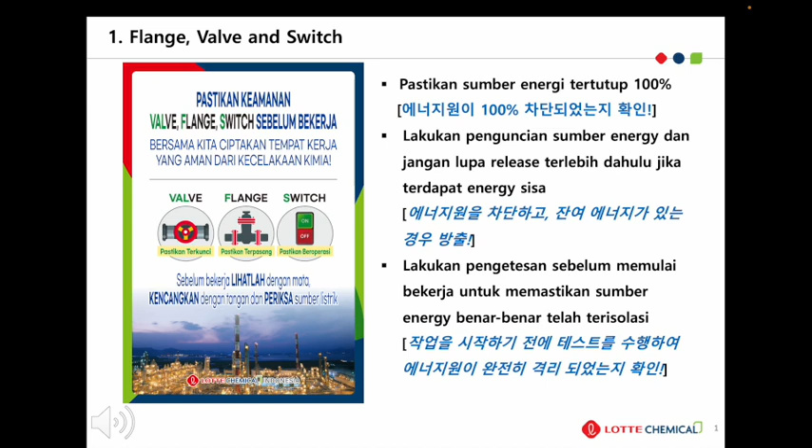Pertama, pada tanggal 22 November 2016 terjadi kebakaran di ExxonMobil di daerah Louisiana, Amerika Serikat. Kebakaran terjadi dikarenakan isobutan rilis dari sela flange. Isobutan membentuk awan yang mudah terbakar dan meledak 30 detik setelah rilis. Kejadian ini menyebabkan 4 pekerja terluka.

Penyebab dari kejadian ini adalah pekerja kurang terlatih dalam melakukan pekerjaan sehingga ia membuka valve yang seharusnya menjadi penahan rilisnya bahan kimia dari dalam pipa.

Kedua, pada tanggal 13 September 2010 telah terjadi kebakaran di salah satu pabrik petrokemikal di dunia. Kejadian ini disebabkan oleh kebocoran heksan dari salah satu valve reaktor. Kebocoran tersebut menyebabkan level fluida dan tekanan drop yang selanjutnya diikuti ledakan besar. Kejadian ini menyebabkan 1 pekerja meninggal dunia dan 4 orang pekerja terluka.

Penyebab dari kejadian ini adalah salahnya pemasangan blind screen yang mana seharusnya dipasang 2 namun pekerja hanya memasang 1 saja. Selain itu penyebab kedua adalah kurangnya monitoring proses yang menyebabkan tekanan tinggi di dalam reaktor menyebabkan aliran heksan menuju pipa yang salah. Sehingga menyebabkan kebocoran heksan dan membentuk awan yang mudah terbakar.

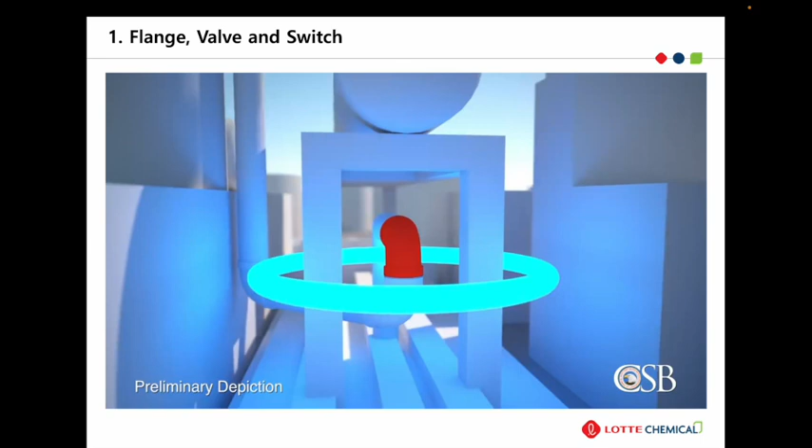The alkylation unit produced components of high-octane gasoline. The leaking process fluid formed a large ground-hugging vapor cloud that surrounded some sections of the unit. 2 minutes later, the cloud ignited, causing a massive fire.

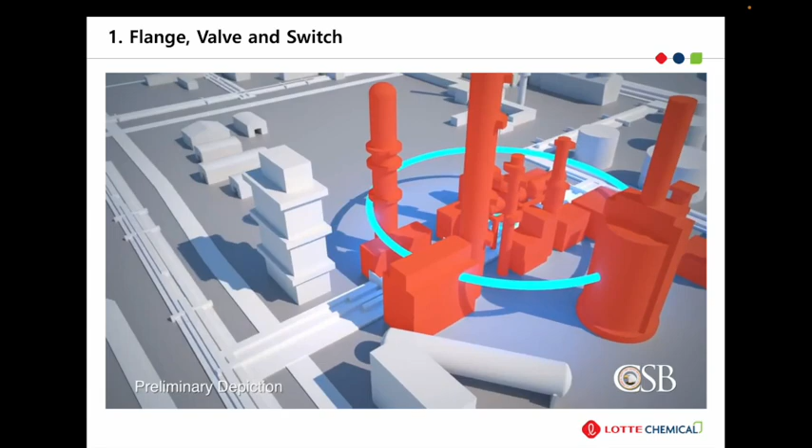A control room operator quickly took steps to prevent the release of additional HF by rapidly draining the unit's hydrofluoric acid to a special vessel designed to hold the acid in the event of an incident.

At 4:15, during the ongoing fire, an explosion erupted in the alkylation unit. 4 minutes later, a second explosion occurred. At 4:22, a process vessel in the unit containing flammable hydrocarbons violently ruptured, causing the largest explosion.

A large 38,000-pound fragment of the vessel flew across the Schuylkill River and landed on the river's opposite bank. 2 other fragments, one weighing about 23,000 pounds and the other about 15,500 pounds, landed inside the refinery.

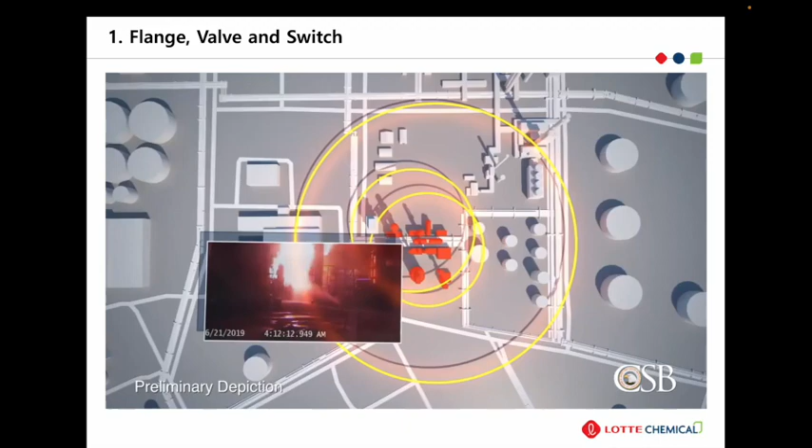The fire burned for over 24 hours until it was finally extinguished the following day at about 8:30 a.m. 5 workers sustained minor injuries during the incident and response. The CSB is unaware of anyone experiencing health impacts from the hydrofluoric acid release.

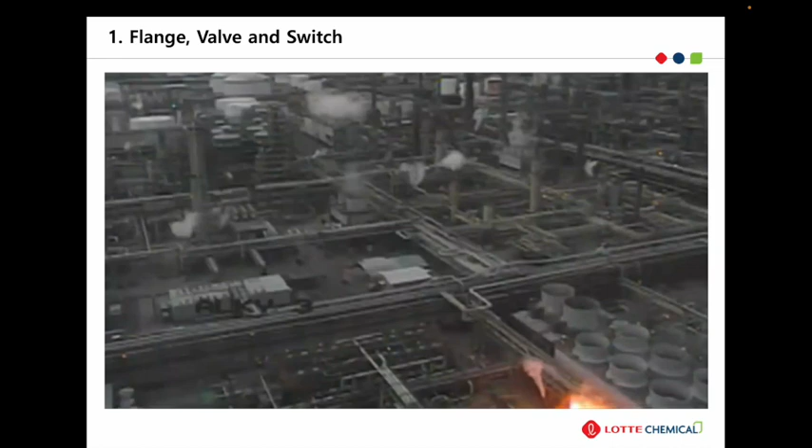November 22nd, 2016, the ExxonMobil refinery in Baton Rouge, Louisiana. A fire erupted during maintenance activities, severely burning 4 workers.

The fire occurred when operators inadvertently removed bolts that secured a piece of pressure-containing equipment to a type of valve known as a plug valve. When the operators then attempted to open the valve, it came apart and released flammable isobutane, which formed a vapor cloud that quickly ignited.

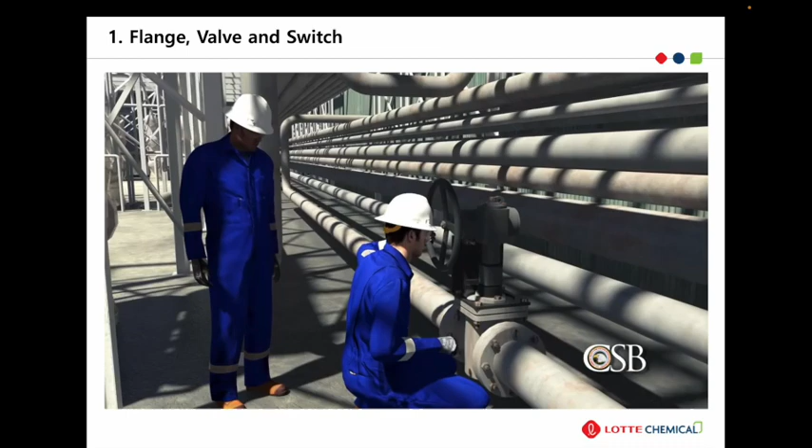During our investigation, the CSB learned that the operators attempting to open the plug valve were following accepted practices within the refinery. Unfortunately, those practices lacked a safety hazard analysis, which needlessly put the workers at greater risk. The management of safety is critical to the protection of workers and the integrity of facility operations.

The fire at ExxonMobil's Baton Rouge refinery occurred in the sulfuric acid alkylation unit. There, isobutane and olefins are converted into a major component of gasoline through a reaction involving sulfuric acid.

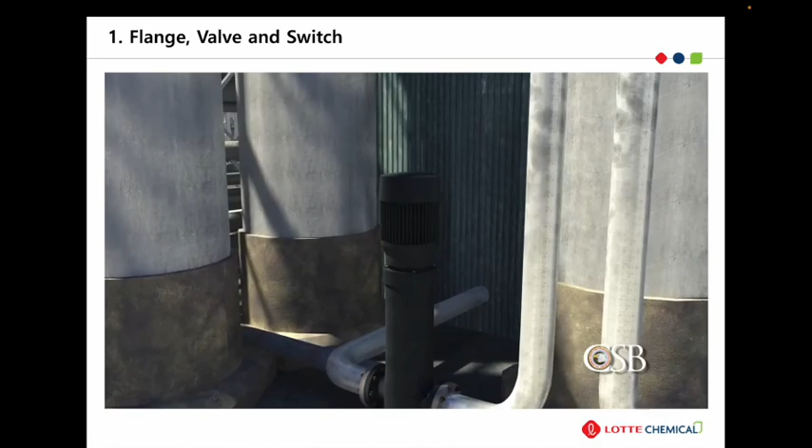On the day of the incident, 2 operators were preparing to put a spare isobutane pump into service. To do so, the operators needed to open the pump's inlet plug valve. That plug valve was operated manually. A hand wheel and a piece of equipment called a gearbox were connected to the valve by a support bracket. The gearbox uses gears to make it easier to turn the valve stem into the open or closed position.

The operators turned the hand wheel on the spare pump's inlet plug valve, but the gearbox was not working properly, and the valve would not open.

When the gearbox was malfunctioning, it was an accepted practice in the alkylation unit for operators to remove the gearbox so that a pipe wrench could be used to turn the valve stem and open the valve. The gearbox was connected to the valve body by the support bracket using bolts.

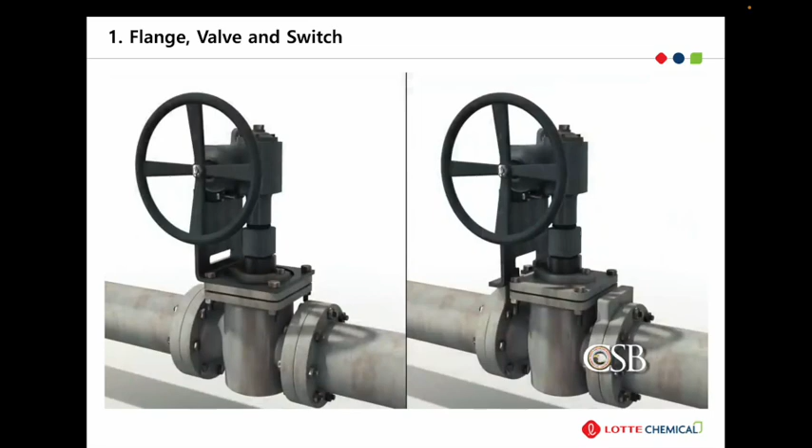The operators removed 4 vertical bolts from the valve. But unknown to the operators, these bolts also secured a critical pressure-containing component of the valve known as the top cap. Approximately 3% of the numerous plug valves in the refinery's alkylation unit were designed so that the gearbox support bracket attached to the top cap.

With this 30-plus-year-old design, removal of the gearbox support bracket can have catastrophic consequences. Approximately 97% of the valves were newer models with updated design that did not connect the gearbox support bracket to pressure-containing equipment, making it less likely to remove the incorrect bolts.

With bolts removed from the top cap, one of the operators attempted to open the valve by rotating the valve stem with a pipe wrench, while the second operator stood by and observed. The valve immediately failed and came apart. Pressurized isobutane escaped from the valve, forming a flammable white vapor cloud.

The 2 operators warned others in the area and directed them to evacuate. Approximately 2,000 pounds of isobutane released to the atmosphere. The vapor cloud likely found an energized welding machine roughly 70 feet away from the initial release and ignited. The resulting fire seriously injured 1 ExxonMobil employee and 3 contractors working in the area.

Our investigation into the incident revealed that management at the ExxonMobil Baton Rouge refinery were accepting of operators in the alkylation unit removing malfunctioning plug valve gearboxes without adequate written procedures or training. The CSB also found that although refinery operators did receive training on hard-to-operate valves, the training did not specifically address how to remove an inoperable gearbox from the older plug valve model.

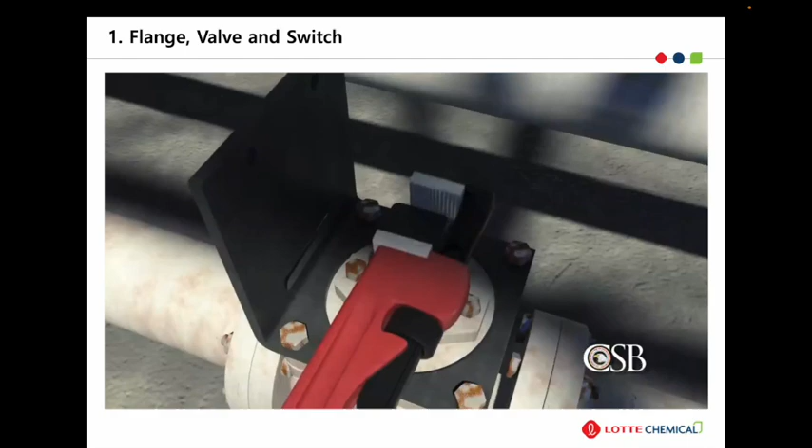In our safety bulletin, we outlined 3 key lessons learned from this incident. The first key lesson is to establish detailed and accurate written procedures for workers performing potentially hazardous work. This is especially important when different types of equipment or configurations exist that could cause confusion.

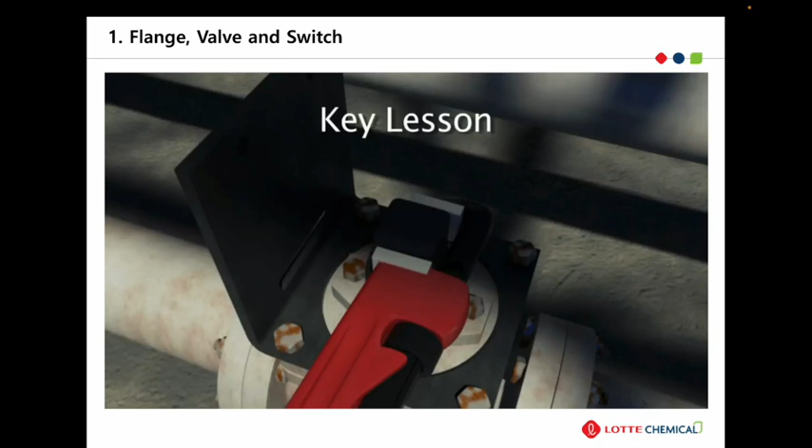A second key lesson is to provide training to ensure that workers can perform all anticipated job tasks. Training should include a focus on processes and equipment to improve hazard awareness and help prevent chemical incidents.

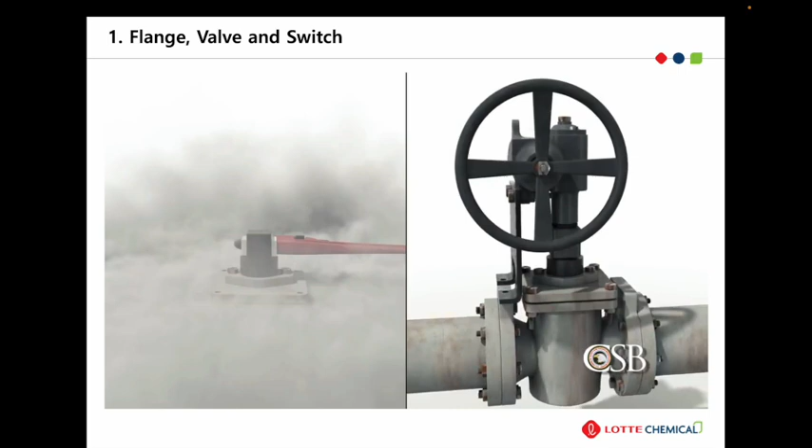In our safety bulletin, we emphasize the hierarchy of controls. This is a method of evaluating safeguards to provide effective risk reduction. Within the hierarchy of controls, an engineering control, such as improved valve design, is more effective than a lower-level administrative control, such as a sign warning workers that the gearbox support bracket connects to pressure-containing components.

The CSB found that the 30-plus-year-old valves left in the refinery were not explicitly required to be updated to the safer design. That is because the older design did technically adhere to current industry standards, which call for items like gearboxes to be capable of removal without affecting pressure-containing parts.

That could be accomplished by removing 2 horizontal bolts that connect the support bracket directly to the gearbox, rather than the 4 vertical bolts that secure the support bracket to the top cap. But on the day of the incident, the operator did not remove the 2 horizontal bolts.

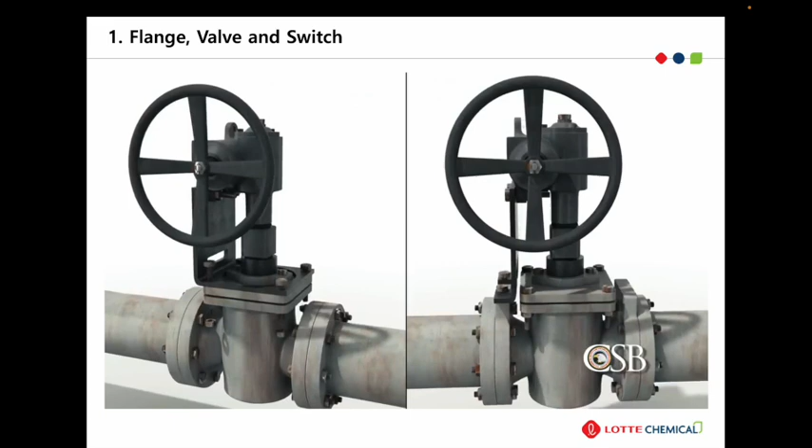The American Petroleum Institute, an industry trade association, says in its safety guidance for improving human performance to make it easy for people to do things right and hard for them to do things wrong. Updating all of the older valves to the safer valve design, as was done to approximately 97% of the valves in the alkylation unit, could have ultimately prevented this incident.

A third key lesson from the CSB's safety bulletin is to apply the hierarchy of controls to mitigate identified hazards. The CSB also found that in its most recent alkylation unit process hazard analysis, the refinery did not evaluate the human factors associated with valve operation and maintenance.

Had the refinery adequately addressed human factors in its most recent process hazard analysis, workers could have discussed difficulties with the removal of the plug valve gearboxes, prompting the company to identify potential hazards. As a result, the older valves could have been recommended for replacement, and the incident would have been avoided.

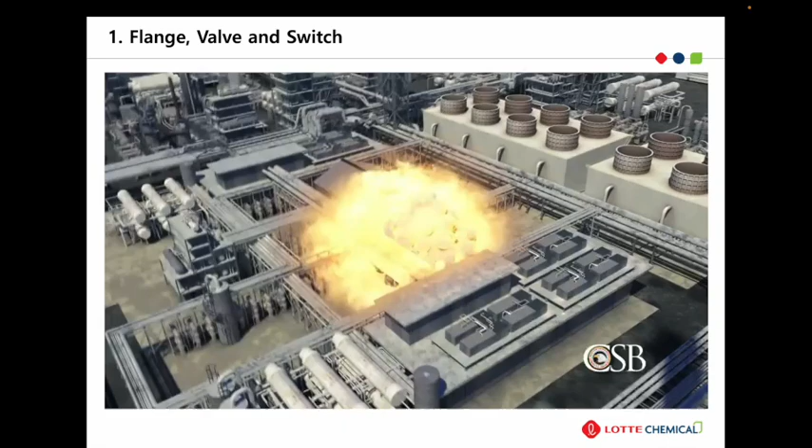The safety management practices outlined in our bulletin could have prevented the fire in Baton Rouge. We urge companies to share and implement our key safety lessons at their facilities in order to prevent future injuries and property damage. Thank you for watching this CSB safety video.

The production sequence of a factory involved the operation of 3 reactors, which could work in series or parallel to increase production capacity. However, it was noticed that one of them was producing out of specification. The leadership team then decided to pause the operation of this single reactor to carry out improvement services.

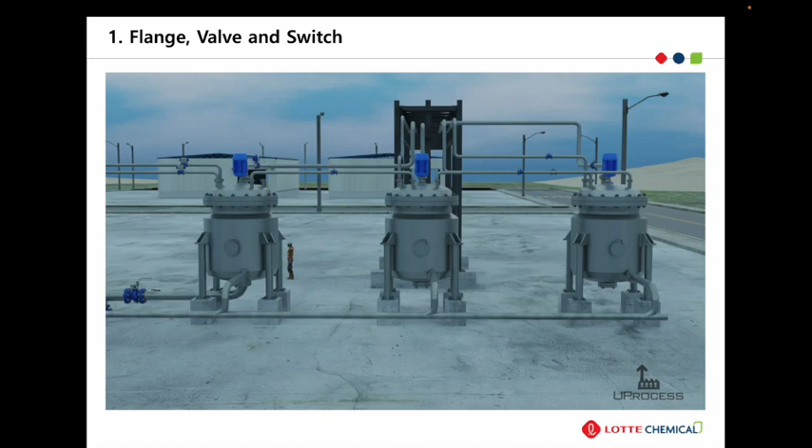A reactor was prepared for maintenance and washed out. The previous solution was drained, and a specific washing was carried out to clean the reactor.

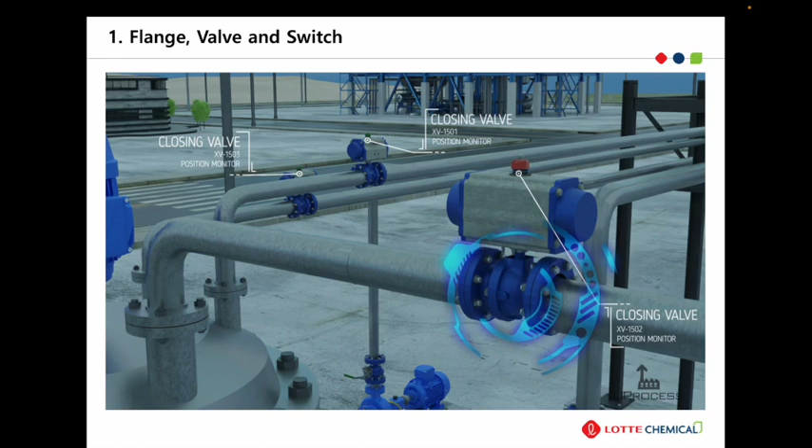The 3 automatic on-off valves supplying the reactor were closed by the panel operator through the control room.

A third-party mechanic was directed to cut the tank drain line to allow for the installation of new equipment. He uses a grinder to carry out the job, supervised by an operator from that area.

However, after a few moments later, they identify a strange noise and started to leave the spot, but they can't escape in time.

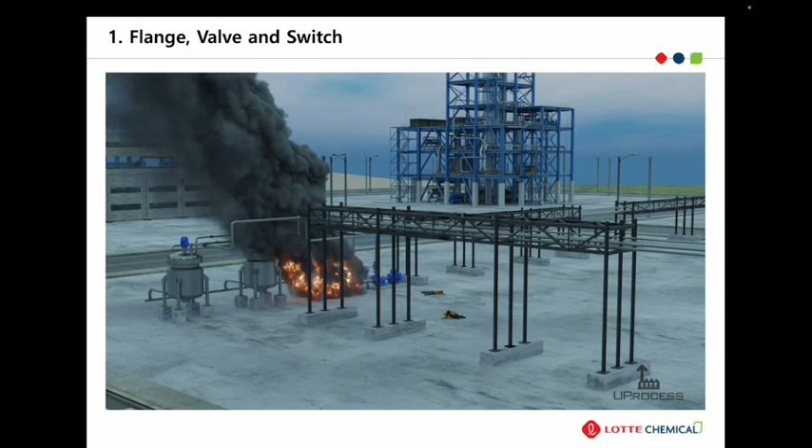Before they managed to leave the place completely, the reactor was blown off and killed the 2 men. A shockwave caused by the explosion knocked the 2 workers to the ground. Unfortunately, they couldn't resist the injuries. Fire and smoke were seen for about 15 minutes until causes were addressed.

So what happened? It was estimated that 7 kilograms of hydrocarbon vapor could have caused the explosion.

Some flammable vapor leaked from the nearby raw material tanks through the closed valves into the reactor and was ignited by a high-speed abrasive wheel, which was being used to cut through one of the pipelines attached to the vessel.

As the valves mistakenly used as blocking were located at a significant height, a local inspection was not carried out to test the effectiveness of the isolation.

After the accident, demonstration cuts were made in the workshop. It was found that as the abrasive wheel broke through the pipe wall, a small flame occurred, and the pipe itself glowed dull red.

The explosion could have been prevented by isolating the reactor by slip plates or physical disconnection. This incident and the others described show that using only valves as LOTO for isolation are not good enough. We must never underestimate checking the effectiveness of the isolation before releasing the permit to work.

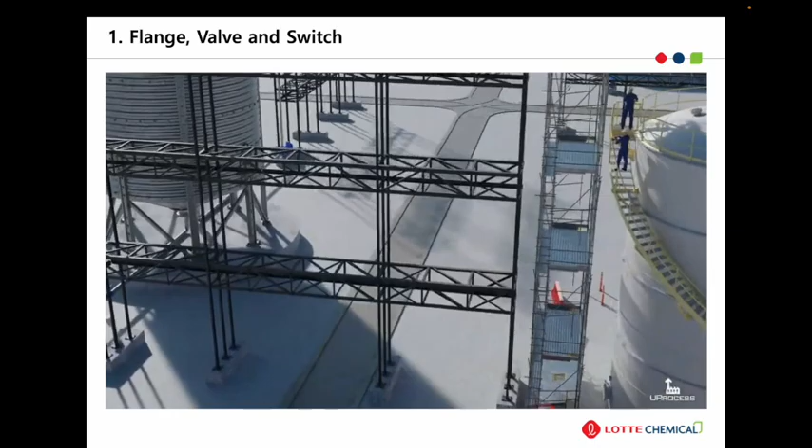A new tank was being filled with water for hydrostatic testing. 2 mechanics were working at the stairs near the roof, finishing the handrails, using angle grinders to polish the structure.

Hydrostatic testing is a process in which components of a system are tested for resistance and leakage by filling equipment with a pressurized liquid. It serves to identify material failures or tank misassembly.

The responsible operator starts the field activities. Firstly, he opens the switch and activates the pump start button. Immediately after he opens the discharge valve, allowing water to enter the tank.

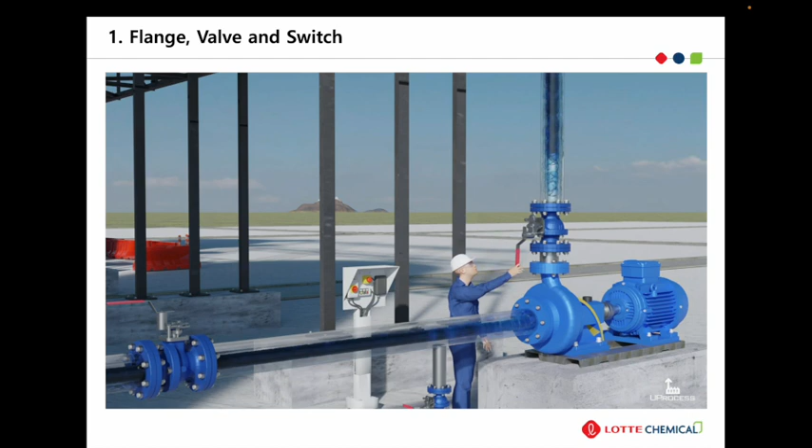But a few hours later, something unexpected happens: an explosion occurs, injuring 2 mechanics working on the tank, throwing them against the handrails.

What happened? The tank had been filled with water through a pipeline, the same pipeline that contained a few liters of gasoline left over from the previous service. So the gasoline was flushed into the tank and floated over the water.

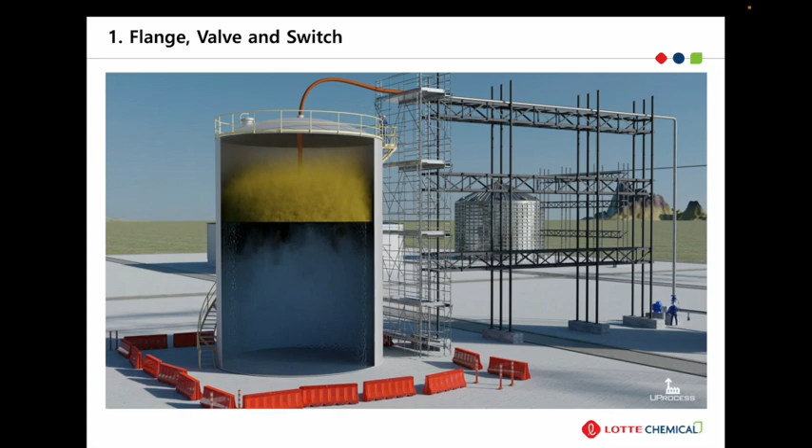And the high ambient temperature caused the gasoline to evaporate. The mechanics performing the hot work eventually ignited the gasoline vapor.

What have we learned? Apart from the fact that the piping has not been purged and mechanically cleaned prior to testing, which already is a serious cause of this event, no one should be allowed to work on the tank during a hydrostatic test.

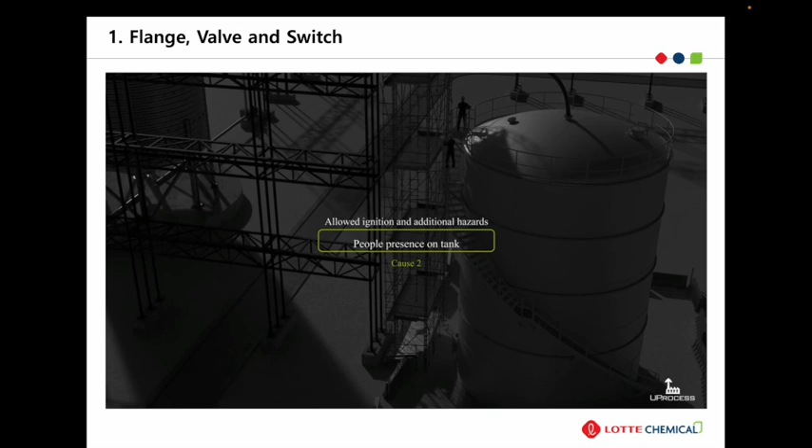One of the reasons for filling the tank with water is to ensure that foundations are strong enough. If you could know that before, there is no need to perform the test. People should be removed from the surroundings and the area should be isolated in case these structures are not strong.

Berikut ini adalah ledakan dan kebakaran yang terjadi di pabrik kimia TPC Group di Port Neches, Texas, pada 27 November 2019. Ledakan tersebut menyebabkan menara proses terlempar ke udara dan mendarat di dalam fasilitas. Kejadian ini menyebabkan 3 orang terluka dan kerusakan properti senilai $450 juta.

Penyebab kejadian adalah kegagalan untuk mengidentifikasi bahwa pompa yang tidak berfungsi lagi di dalam unit butadiene menyebabkan terjadinya dead leg yang berbahaya. Oleh karena itu, analisa bahaya proses harus diimplementasikan dengan baik.

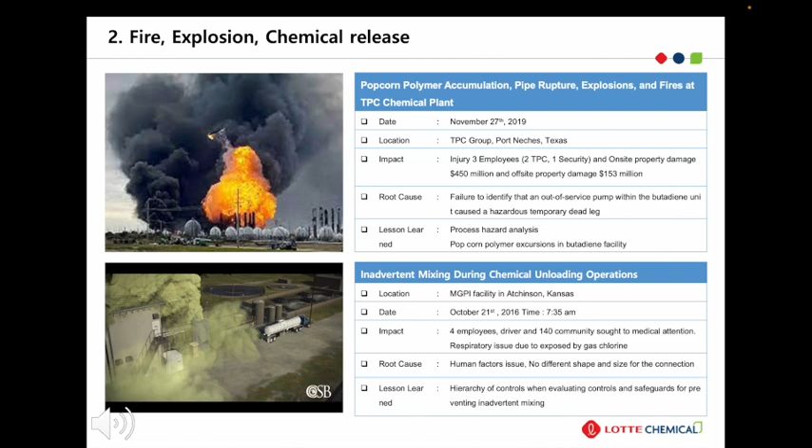Pelajaran dari kejadian ini adalah setiap jalur untuk loading bahan kimia harus dibedakan, diberikan keterangan, dan selalu dilakukan pengawasan saat kegiatan loading.

October 26, 2019, the Aghorn Operating Incorporated water flood station near Odessa, Texas. One Aghorn employee succumbed to toxic hydrogen sulfide gas that had escaped through a damaged pump. His spouse was also fatally injured by the hydrogen sulfide gas while searching for him at the facility after he didn't return home. Hydrogen sulfide is prevalent throughout oil and gas formations in the United States and at many oil

and gas production and processing facilities. Hydrocarbons from the Permian Basin in particular are known to contain high concentrations of hydrogen sulfide that are immediately dangerous to life or health. Our review of this event is about the unfortunate loss of 2 lives.

But the lessons from this incident affect the multitude of other oil and gas facilities throughout the country that handle toxic hydrogen sulfide. This incident was both tragic and unnecessary.

We urge companies operating oil and gas facilities to understand the findings from this investigation and implement appropriate safeguards and training. We need to work together to ensure that our workers and community members return home safely each and every day.

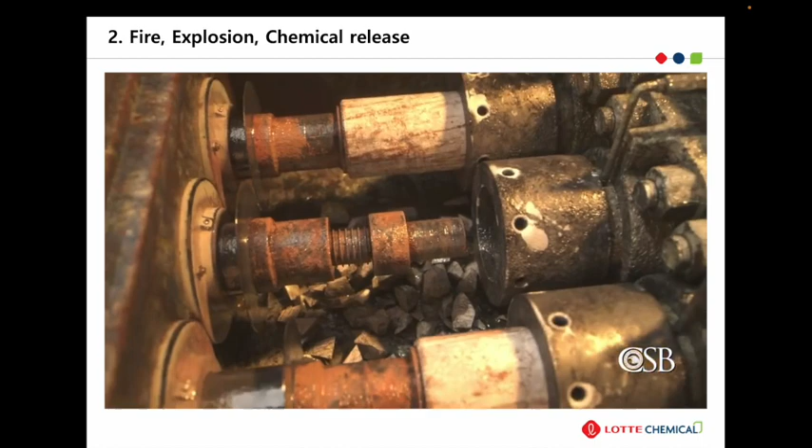After the incident, the CSB found that a plunger on the pump had shattered, which had allowed water containing hydrogen sulfide to escape from the pump into the pump house where the pumper was working. Due to limitations of available evidence, the CSB was unable to determine whether the pump failure and water release occurred before the pumper arrived at the facility, or if the pump automatically turned on while the pumper was closing valves.

After several hours, when the pumper did not return home, his spouse drove with their 2 children to the station to check on him. She entered the waterflood station facility and searched for him. She soon found him on the floor in the pump house. She then was also overcome and fatally injured by the toxic hydrogen sulfide gas.

A short time later, emergency responders approached the pump house. They detected a very strong smell of hydrogen sulfide. This required them to set up the command post outside the front gate of the facility and wear self-contained breathing apparatus. They found the pumper and his wife deceased inside the pump house, and water spilling from pump number 1.

The responders rescued the 2 children who were inside the spouse's car. Working with Aghorn employees, they were able to stop the water release the following morning.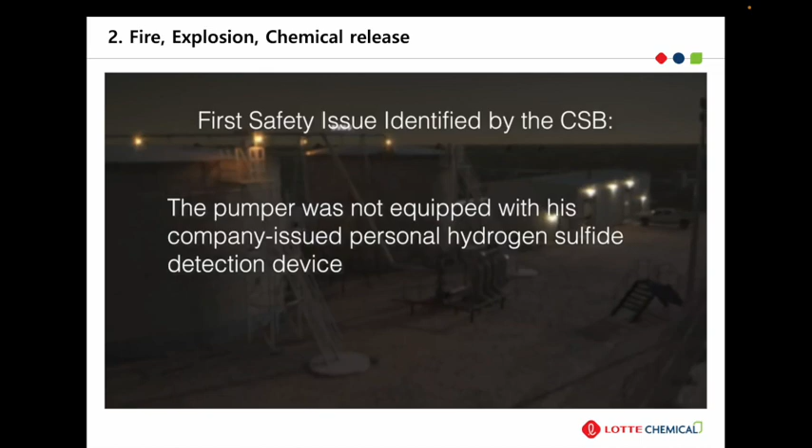During our investigation, we identified 6 major safety issues at the facility. One of the 6 safety issues identified was that the pumper was not equipped with his company-issued personal hydrogen sulfide detection device inside the pump house on the night of the incident. When the pumper's personal hydrogen sulfide detector was located in his work truck, it was found to be in an alarm state, meaning it had detected dangerous levels of hydrogen sulfide.

The potential for a hydrogen sulfide release was a known hazard at the water flood station, as indicated by the posted signage and a safety pamphlet provided to all employees. However, there was no evidence that Aghorn management required use of personal hydrogen sulfide detectors or adequately trained employees that equipment malfunctions could indicate a toxic hydrogen sulfide release.

Companies should ensure workers always use the required safety equipment, such as personal detectors, when entering a potentially hazardous area. Regular training and posting signs will help remind employees to use their safety equipment every time.

The second safety issue CSB investigators discovered is that at the time of the incident, Aghorn did not have any written lockout-tagout policies or procedures, but relied on verbal procedures without formalized training.

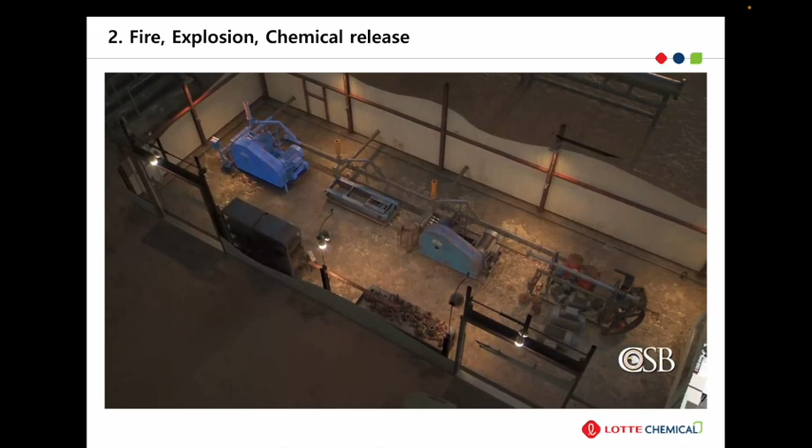On the night of the incident, the pumper did not properly perform lockout-tagout to de-energize the pump before performing work on it. Instead, he started to close the pump's valves while the pump was still configured to be automatically operated by the control system. As a result, the control system automatically turned the pump on, and water containing hydrogen sulfide was able to escape from the pump when the discharge valve was closed.

Companies must have written lockout-tagout policies and procedures that instruct to isolate all possible sources of energy before employees perform work on equipment. Companies also need to routinely train employees on the lockout-tagout procedures.

The third safety issue identified by the CSB was that ventilation inside the pump house was inadequate, leading to fatal concentrations of hydrogen sulfide gas within the building. The CSB found that the pump house could be ventilated by 2 bay doors, exhaust fans, and natural vents on each of the 4 outside walls.

Due to the limitations of available evidence, the CSB was unable to confirm whether the exhaust fans were operational at the time of the incident. The 2 bay doors were approximately 60% open, but this was not enough to adequately ventilate the building. And the CSB's investigation could not find any evidence that Aghorn assessed the pump house to ensure it could be properly ventilated, despite the potential for a hydrogen sulfide release to occur inside.

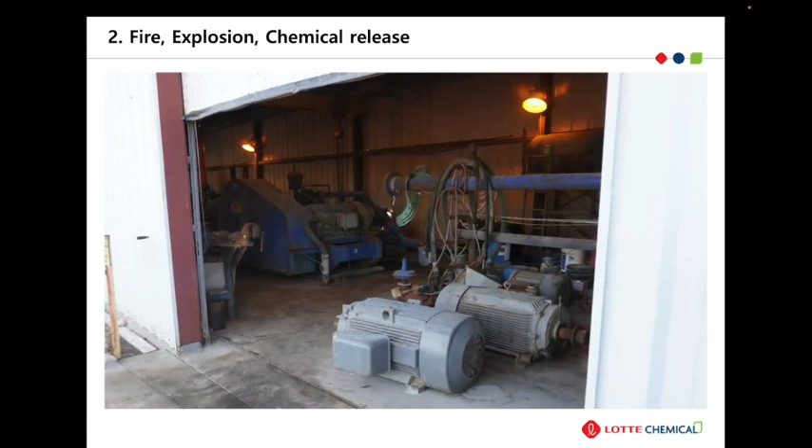Companies should evaluate any buildings that contain equipment handling toxic gases and determine if the building is necessary. If it is, companies should ensure the building is equipped with a functioning toxic gas detection and alarm system and a ventilation system designed for the release of toxic gases. If the building is not necessary for the operation, a safety assessment should be conducted to determine if removal of the building or relocation of the equipment can prevent confinement of any toxic gas releases.

The fourth safety issue noted by the CSB was the lack of a robust safety management program at Aghorn. Comprehensive safety management practices include risk identification, assessment, mitigation, and monitoring of design, procedures, maintenance, and training. Safety management practices are an essential element of protecting workers and non-employees from toxic gases at chemical plants. At Aghorn, there were no operational, training, testing, and maintenance procedures or records, other than items such as a cell phone use policy and a pamphlet on the hazards of hydrogen sulfide. These items were not sufficient to prepare employees for potential encounters with hazards inherent to their work.

At facilities that handle toxic gases, companies must develop and implement a robust safety management program to protect workers and non-employees from exposure to toxic gas. The CSB identified a fifth safety issue at Aghorn, which was a non-functioning hydrogen sulfide detection and alarm system.

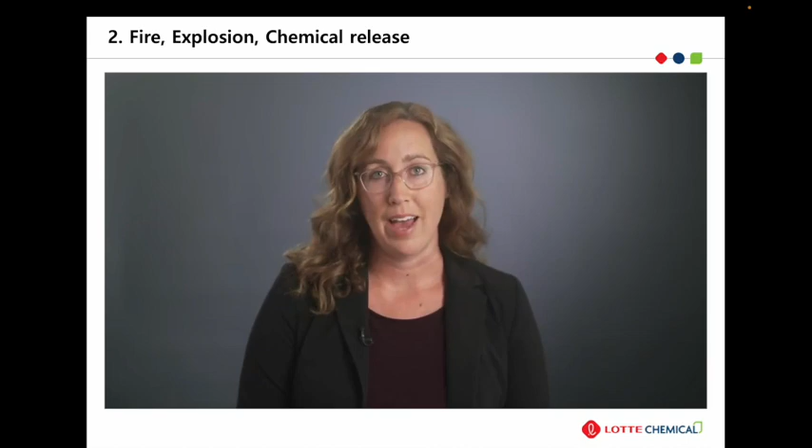As a result of its investigation, the CSB made the following recommendations to Aghorn Operating Incorporated for safety improvements at all water flood stations where the potential for exposure to dangerous levels of toxic hydrogen sulfide gas exists. These include mandate the use of personal hydrogen sulfide detection devices, develop a site-specific, formalized, and comprehensive lockout-tagout program for each facility, commission an independent and comprehensive analysis of each facility to examine ventilation and mitigation systems, develop and demonstrate

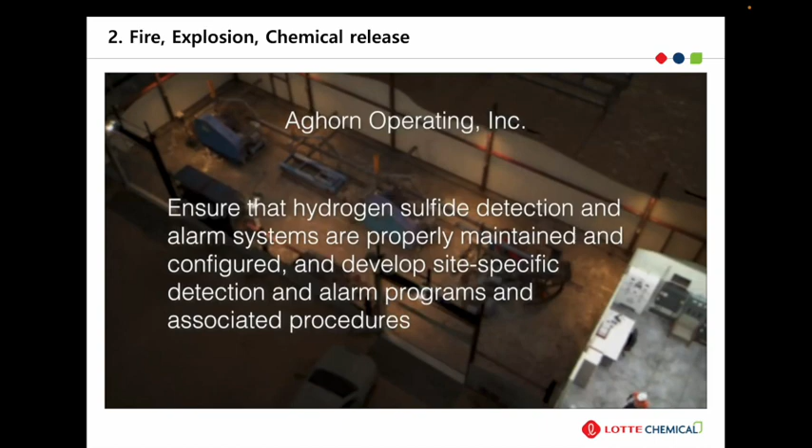the use of a safety management program that includes a focus on protecting workers and non-employees from hydrogen sulfide, ensure that hydrogen sulfide detection and alarm systems are properly maintained and configured, and develop site-specific detection and alarm programs and associated procedures. Ensure that the hydrogen sulfide detection and alarm system designs employ multiple layers of alerts unique to hydrogen sulfide, and develop and implement a formal, written, site-specific security program to prevent unknown and unplanned entrance of those not

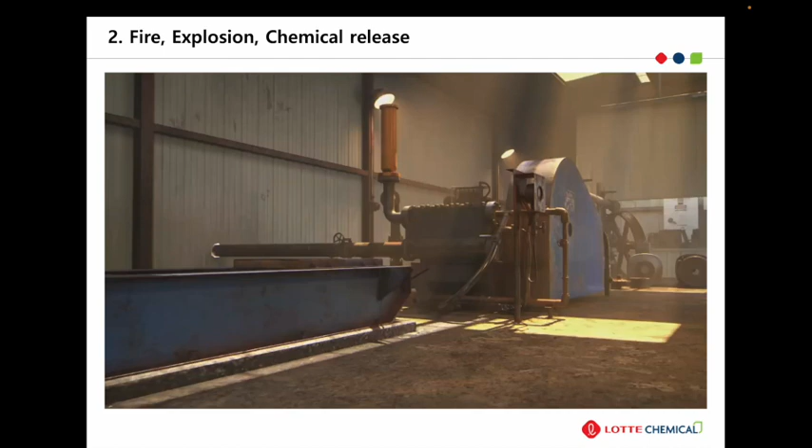employed by Aghorn. The CSB also recommended that OSHA issue a safety information product that addresses the requirements for protecting workers from hazardous air contaminants and from hazardous energy. And the agency made a recommendation to the Railroad Commission of Texas to develop and send a notice to all oil and gas operators that fall under its jurisdiction that describes the safety issues outlined in the CSB's report.

Aghorn's safety deficiencies identified by the CSB through this investigation can be corrected. OSHA implementation of CSB's recommendation would send a strong message to the chemical industry of their priority to protect workers from the risks of chemical releases. This recommendation would not be limited to hydrogen sulfide, but would encompass workers across chemical facility domains.

The implementation of CSB's recommendation to the Railroad Commission of Texas would make significant strides to educating the chemical industry and address the majority of water flood stations that involve hydrogen sulfide. Many of these companies are small and involve employees that work alone, and in many cases in remote locations. This recommendation would also go a long way to help educate those companies that may not be on the leading edge of safety.

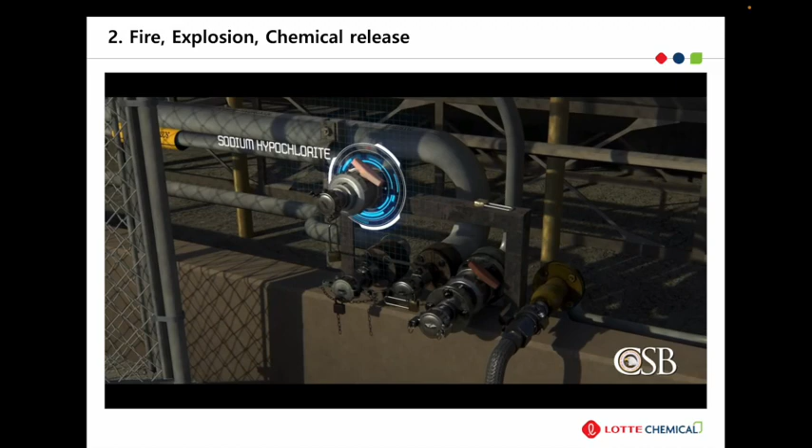The operator remembers pointing out the correct fill line to the driver before he returned to his workstation. The driver, however, does not recall hearing the operator identify the fill line. Unknown to the operator, the sodium hypochlorite fill line was also unlocked, and the two lines, which were only 18 inches apart, looked similar and were not clearly marked. The driver connected his truck's sulfuric acid hose to the sodium hypochlorite line, and sulfuric acid began flowing inside. He then returned to the cab of his truck.

Shortly before 8 a.m., a greenish-yellow gas began flowing from the bulk tank of sodium hypochlorite. The driver noticed the cloud in his truck's side view mirror and attempted to return to the connection area to turn off the flow of sulfuric acid, but the gas overwhelmed him. He then ran to the passenger side of the truck to close a valve that could halt the flow, but he was prevented from doing so by the gas. Instead, he ran away from the cloud and escaped to a separate area of the facility.

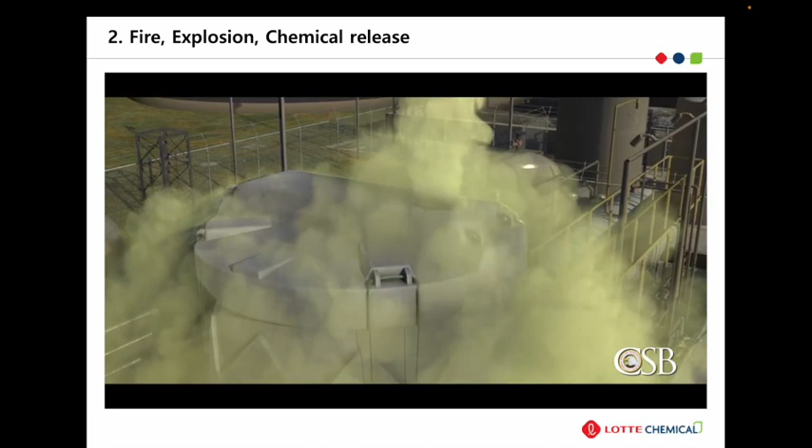At about the same time, toxic gases entered the facility control room through the building's ventilation system. MGPI operators preparing for shift change in the control room were immediately overcome by the toxic gas. Because the operators had a practice of locking respirators between shifts, some were unable to access their respirators before evacuating the building. With no other way to stop the flow other than closing manual valves on the fill line or truck, or by triggering one of the truck's emergency shutoffs, the sulfuric acid continued to enter the sodium hypochlorite tank for nearly 45 minutes until emergency responders shut down the flow.

Approximately 4,000 gallons of sulfuric acid combined with 5,800 gallons of sodium hypochlorite, causing a large, dense cloud containing chlorine gas, which soon drifted off-site. MGPI employees were evacuated from the site, and 11,000 Atchison citizens were advised to either shelter in place or evacuate. Over 140 people, including MGPI employees, emergency responders, the truck driver, and members of the public, sought medical attention, some requiring hospitalization.

Chemical distribution takes place on a massive scale in the United States. According to a study by the National Association of Chemical Distributors, more than 39.9 million tons of product were delivered to customers every 8.4 seconds in 2016. The CSB is concerned that there are many opportunities for incidents like the one at MGPI to occur.

John Hennigan is director of the Pipeline and Hazardous Materials Safety Administration's Hazardous Materials Safety Southern Region Enforcement Office. According to our data from 2014 through 2017, unloading incidents involving hose connections to incorrect tanks occur frequently. These incidents are often quite serious because of the large amount of chemicals involved. Most commonly, the incidents involve compatible materials and result in tank overfills. Incidents similar to the one at MGPI, where two incompatible materials are inadvertently mixed and result in a chemical reaction, occur less often, but are nonetheless problematic.

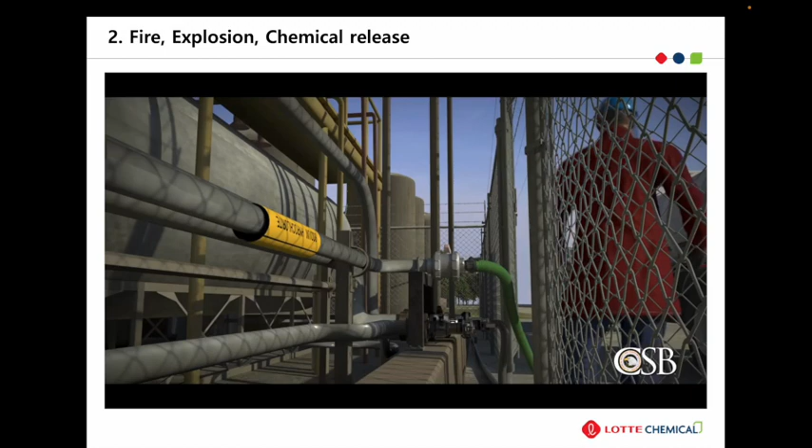For example, at MGPI, the CSB found that the close proximity of the sulfuric acid fill line to the sodium hypochlorite fill line increased the likelihood for workers to make an incorrect connection during chemical unloading. The CSB also discovered that the two fill lines looked and functioned identically, using the same type of connections. Lastly, the CSB found that of the 5 fill lines in the unloading area, only one was labeled at the point where the hose connected.

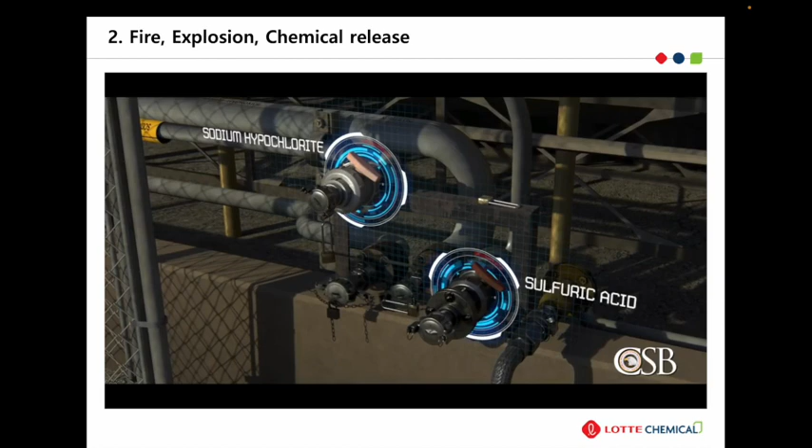A key lesson from our case study is for facilities to evaluate chemical unloading equipment and processes, and implement safeguards to reduce the likelihood of an incident. This should be done while taking into account human factors issues that can impact how facility operators and drivers interact with that equipment. This can include physically separating fill lines by a discernible distance, selecting hose couplings and fill line connections with unique shapes or colors for each type of chemical, and ensuring that fill lines are properly labeled.

Also, during its investigation, the CSB found that at the time of the incident, MGPI did not have instrumentation that could automatically shut down the transfer of chemicals from the unloading area in the event of a process deviation, since the only ways to shut down the transfer of sulfuric acid to the sodium hypochlorite tank required human interaction and were located within areas affected by the release. There was no way for workers without proper personal protective gear to stop the flow once it began.

Another key lesson from our case study is for facility management to evaluate their chemical transfer equipment and processes, and where feasible, install alarms and interlocks in the process control system that can shut down the transfer of chemicals in an emergency. Finally, the CSB found that MGPI's procedures were not aligned with their work practices.

On the day of the incident, the operator was not present when the transfer hose was connected to the fill line, even though the company's procedures state that operators must verify the connection and that the operator should be the one to open the fill line valve. But the CSB discovered that some operators were not aware of these steps in the procedures, and that it was their practice to have drivers open the fill line valve, thinking this would be safer, since drivers wear personal protective equipment in the event of a release.

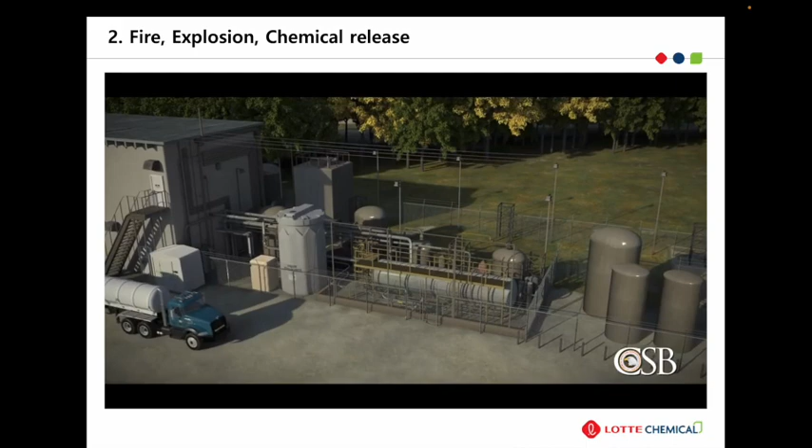As the MGPI incident demonstrates, although unloading operations are relatively simple compared to many of the complex processes taking place in chemical facilities, the consequences can greatly impact workers and surrounding communities due to the large amounts of chemicals transferred during deliveries. Chemicals are transported and delivered every day all around us. Because these deliveries are so common, the CSB strongly urges the managers of facilities and distributors to review and adopt the key lessons from our case study and work together to prevent future incidents like the one at MGPI.

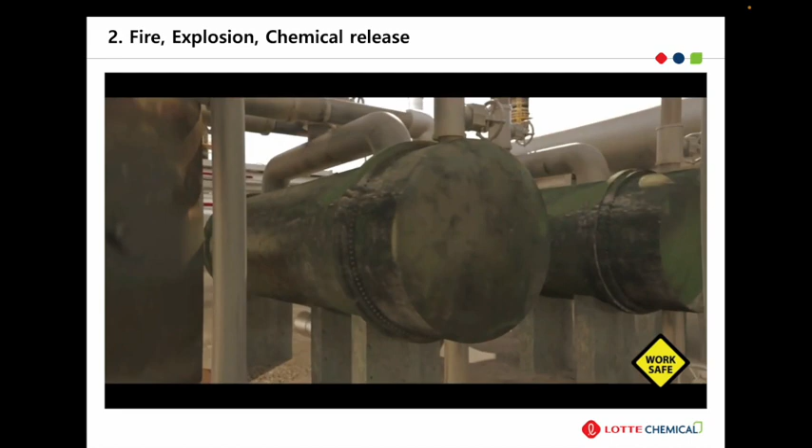The Williams Geismar Olefins plant is located in Geismar, Louisiana. The plant produces ethylene and propylene, chemicals used in the petrochemical industry to make a variety of products, including plastics and antifreeze. Within the Williams process is a distillation column called the propylene fractionator. It separates a mixture of propane and propylene. Heat exchangers called reboilers supply heat to the fractionator to boil the propane and propylene mixture, which is essential to the separation process. The reboilers are shell and tube heat exchangers.

Hot water flows through the tubes, heating and vaporizing propane that flows through the shell and back to the propylene fractionator. The water that flows through the tubes contains a small amount of oily tar, which condenses into the water earlier in the process. Over time, the oily tar from the water builds up on the walls of the reboiler tubes. This buildup is called fouling. Fouling reduces the efficiency of the reboilers. Periodically, the reboilers must be shut down to clean the tubes.

The original propylene fractionator design had both reboilers running simultaneously, but in that configuration, the fractionator had to be shut down when a reboiler fouled and needed cleaning. To prevent shutdown of the propylene fractionator each time the reboilers needed to be cleaned, in 2001, new valves were installed on each reboiler to allow for operation of only one at a time. The other reboiler is on standby, clean and ready for use. But unforeseen at the time, these valves introduced a serious hazard: they isolated the standby reboiler from its protective pressure relief valve, located on top of the fractionator.

On June 13, 2013, during a daily meeting with operations and maintenance personnel, the Williams plant manager noticed that the water flow rate through the operating reboiler had dropped gradually over the past day. The operations supervisor informed the group he would try to identify the problem. He went into the plant to evaluate the water flow rates. The operations supervisor informed several personnel that fouling within the operating reboiler could be the problem, and they might need to switch the reboilers. He attempted to meet with his manager so they could get the necessary maintenance and operations personnel involved who would perform the work.

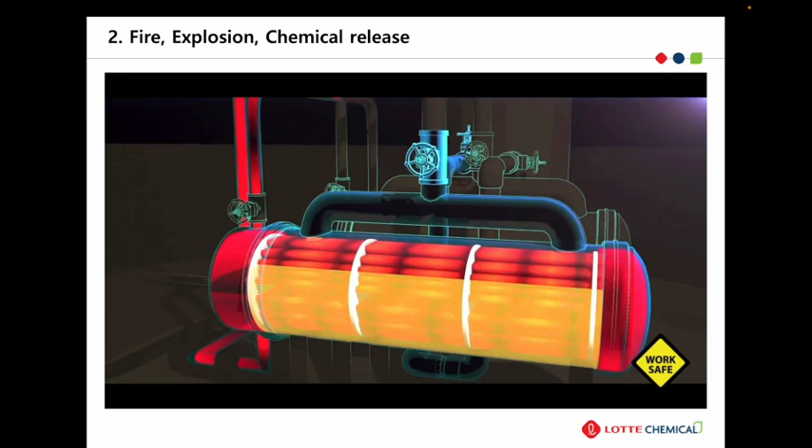But unknown to the operations supervisor, the standby reboiler contained flammable liquid propane that had accumulated during the 16 months the reboiler was out of service. The hot water quickly heated the liquid propane confined inside of the reboiler, and pressure dangerously increased. Just 3 minutes later, the reboiler violently ruptured. Propane exploded from the reboiler and ignited to create a massive fireball. The explosion killed the operations supervisor and an operator working nearby. 167 Williams employees and contractors reported being injured.

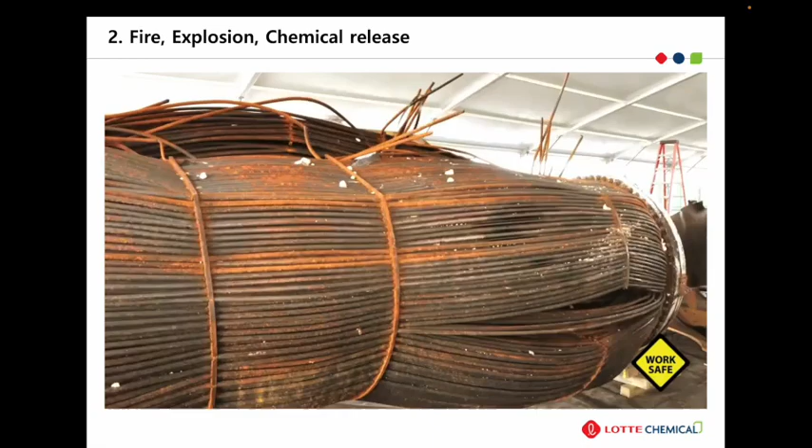During its investigation, the CSB found that prior to the explosion, the standby reboiler had been out of service for over a year, isolated from the process by closed block valves. But during this 16-month period, liquid propane unintentionally entered the shell of the reboiler, perhaps through a mistakenly opened valve or a leaking block valve. The CSB determined that when the operations supervisor opened the hot water valves to the standby reboiler, the propane liquid trapped inside was heated and expanded in volume to completely fill the reboiler shell. This caused pressure to dramatically increase until the reboiler ruptured.

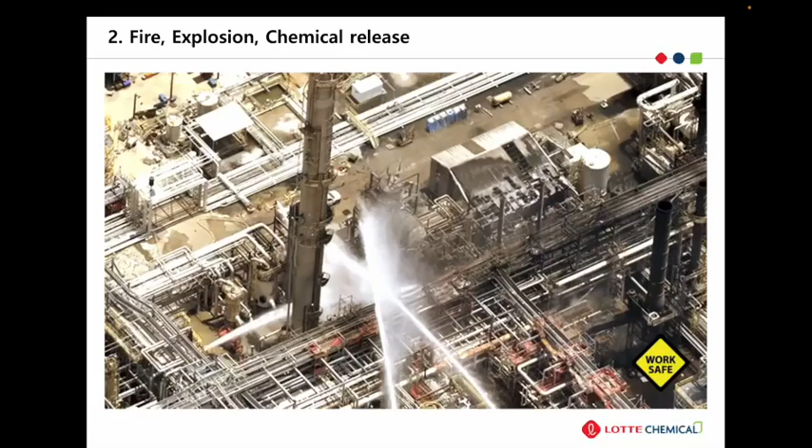The CSB discovered that in the 12 years leading to the incident, a series of process safety management program deficiencies caused the reboiler to be unprotected from overpressure. When Williams installed the process block valves on the reboilers in 2001, they performed a management of change review to identify how this action affected the safety of the process. The CSB found, however, that Williams did not identify that the new valves could isolate the reboilers from their protective pressure relief valve.

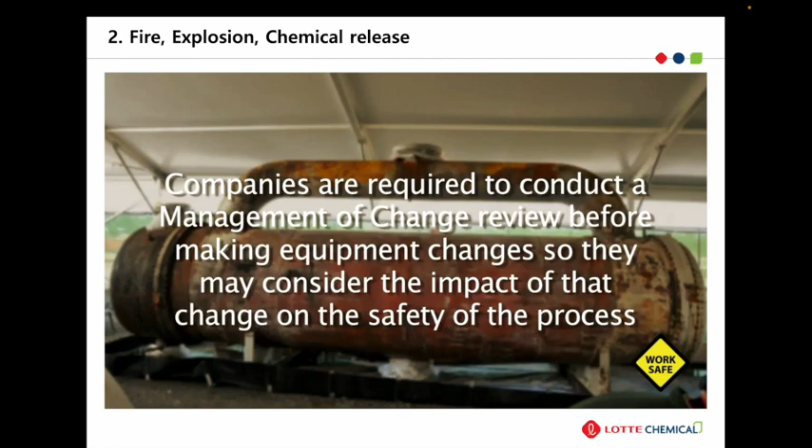Companies are required to conduct a management of change review before making equipment changes, so they may consider the impact of that change on the safety of the process. But the CSB discovered that Williams conducted the management of change review after the process was already operating with the new valves. After the 2001 reboiler valve installation, Williams also performed a pre-startup safety review, as required by regulations.

But the CSB found that Williams reviewers did not respond to key process safety questions on the form. One of those questions asked, are pressure relief systems in place and operational? That answer was left blank.

The CSB found that in the following 10 years, Williams performed 3 process hazard analyses, or PHAs, in 2001, 2006, and 2011. None of the PHAs sufficiently identified or controlled the reboiler overpressure hazard. An internal recommendation from the 2006 PHA stated, consider locking open at least one of the manual valves associated with each of the propylene fractionator reboilers. While that recommendation was marked as complete, the CSB found that it was not implemented as intended.

The CSB found that Williams failed to develop a procedure for activities performed on the day of the incident. As fouling in the quench water system was a known issue, Williams should have had a written procedure to assess fouling and switch the reboilers. Furthermore, the company could have established a routine maintenance schedule to prevent extensive fouling in the first place.

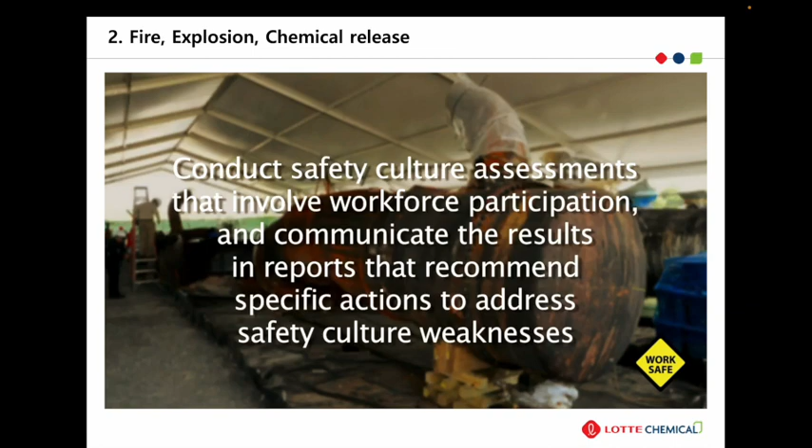To prevent future incidents and further improve process safety at the Geismar plant, the CSB recommended that Williams conduct safety culture assessments that involve workforce participation and communicate the results in reports that recommend specific actions to address safety culture weaknesses. Develop a robust safety indicators tracking program that uses the data identified to drive continual safety improvement, and perform comprehensive process safety program assessments to thoroughly evaluate the effectiveness of the facility's process safety programs.

In its case study, the CSB encourages companies from across the country to review and incorporate the safety lessons and recommendations from the Williams Geismar plant investigation within their own facilities.

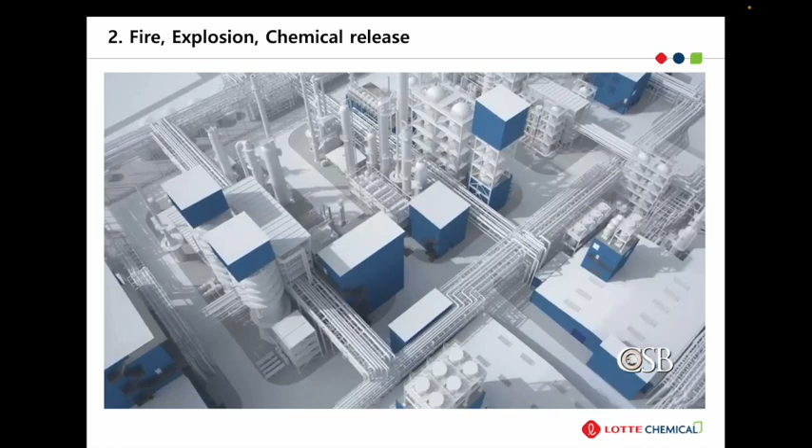May 19th, 2018, the Kuraray America chemical plant in Pasadena, Texas. The plant manufactures Eval, a copolymer made from ethylene and vinyl alcohol. Eval is used in food packaging and storage containers. Kuraray shut down the Pasadena plant on April 6th for a maintenance turnaround and to install various equipment upgrades.

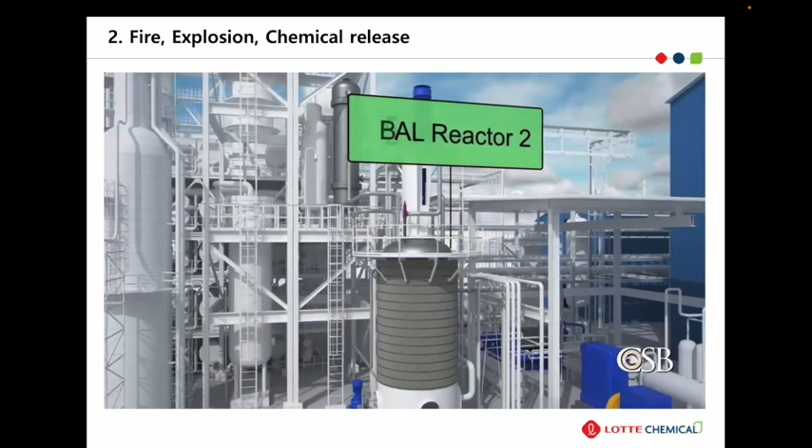By May 18th, Kuraray operations personnel were taking steps to bring one of 4 reactors back online. The reactor, known as Eval Reactor 2, looked similar to the others, but had a lower maximum design pressure of 740 psi. The design pressure of the other 3 reactors was 1150 psi. The reactor already had liquid methanol and ethylene vapor inside as operators began incrementally raising the reactor system pressure. They did so by adding additional ethylene vapor.

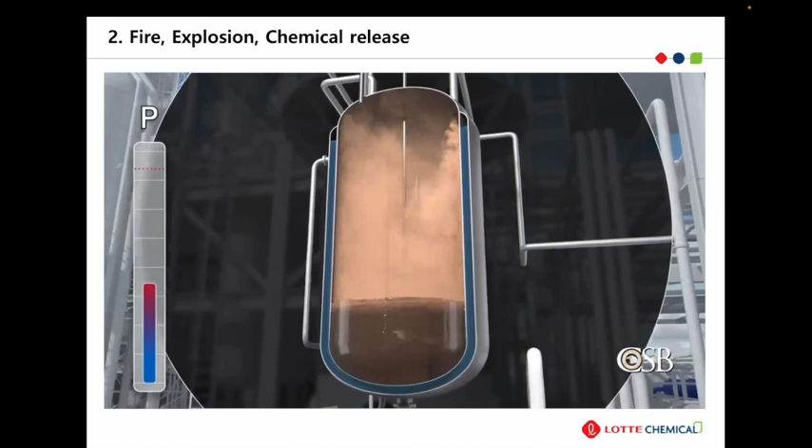Pressure was raised in order to reach the target pressure necessary for the reactor to start up, while also checking for leaks. In the meantime, chilled liquid from the plant's newly installed refrigeration system was circulating through the reactor's heat exchanger. After 11:20 p.m., the reactor pressure, together with the low temperature from the chilled liquid, created conditions that allowed the ethylene gas in the reactor to condense to liquid.

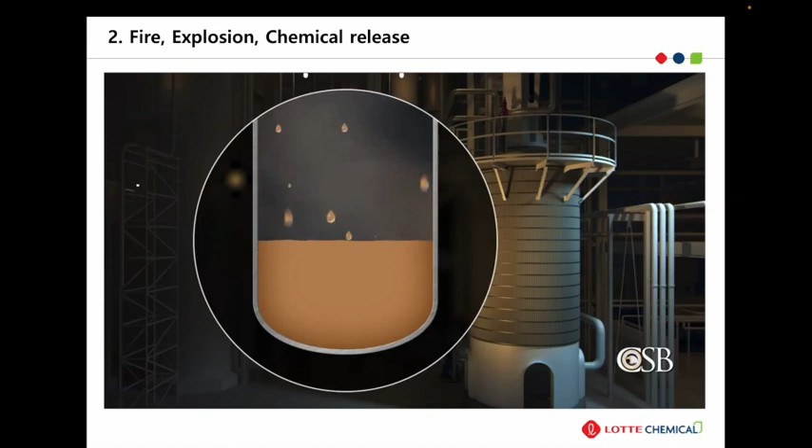This caused the temperature in the reactor to decrease. Around 7 a.m. on May 19th, a supervisor noticed the low temperature in the reactor and instructed operators to stop circulating the chilled liquid through the heat exchanger.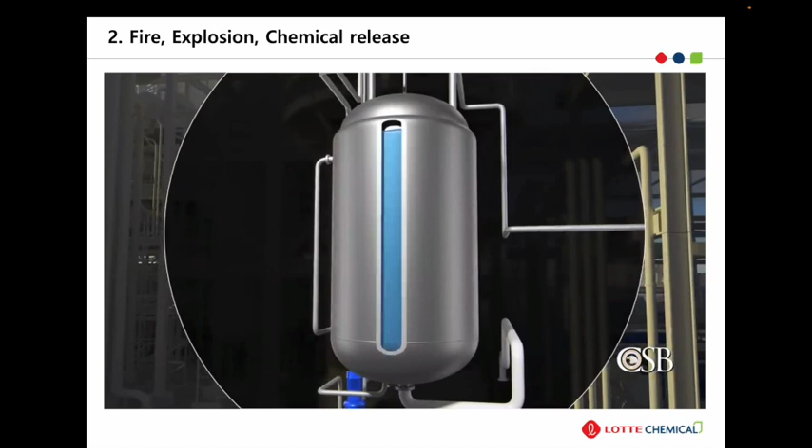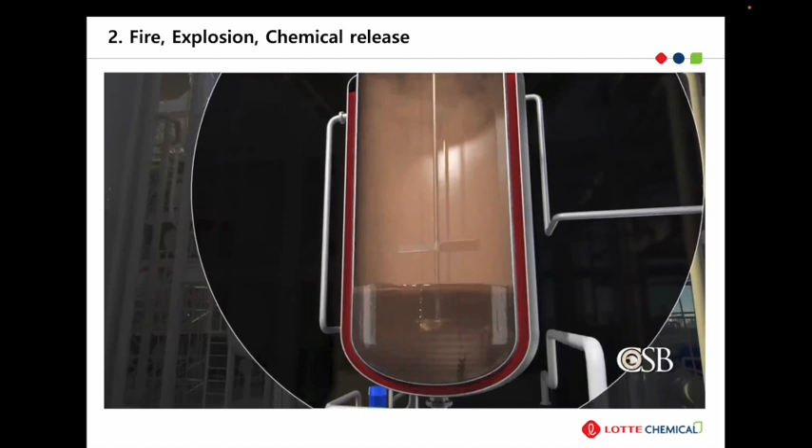The reactor was surrounded by a heat transfer jacket, which uses water to control the temperature inside the reactor. To further help warm the reactor, Kuraray personnel periodically added steam to the jacket, increasing the temperature of the water. As the temperature of the reactor increased with each injection of steam to the heat transfer jacket, some liquid ethylene inside the reactor vaporized. This raised the pressure inside the reactor.

By about 8:45 a.m., the reactor reached the target operating pressure of nearly 600 psi, but pressure continued to increase. Around 9 a.m., the pressure reached 640 psi, and the high pressure alarm went off.

A board operator responded by periodically opening a pressure control valve to send some of the vapor inside the reactor to a flare. The board operator was concerned about exceeding environmental emissions limits for the flare. As a result, he did not fully open the pressure control valve.

He was also focused on other startup activities and did not realize the valve was not open as much as it needed to be to bring the pressure under control. Pressure inside the reactor continued to climb.

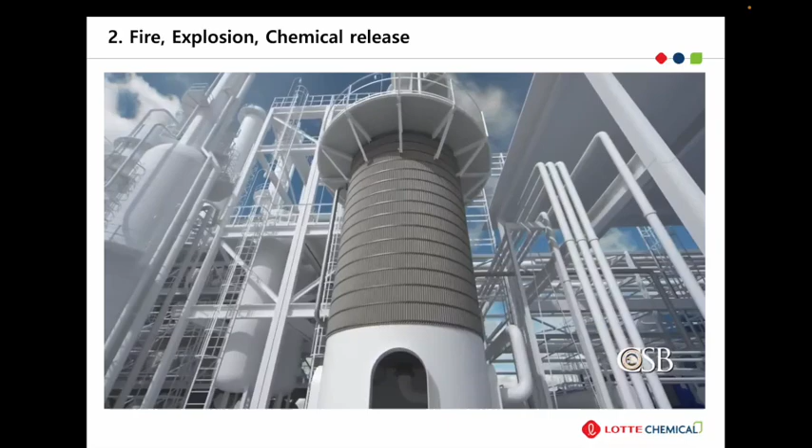Shortly after 10 a.m., operators initiated the next step in the startup. At that time, a new board operator took over and noticed the pressure in the reactor was over 700 psi. But the operator did not recall that this reactor had a maximum design pressure of 740 psi. He thought it could withstand higher pressure like the others.

Like the first board operator, the new operator only partially opened the pressure control valve, not realizing how dangerously close the pressure was to the reactor's limit. The partially open control valve was not enough to relieve the pressure in the reactor.

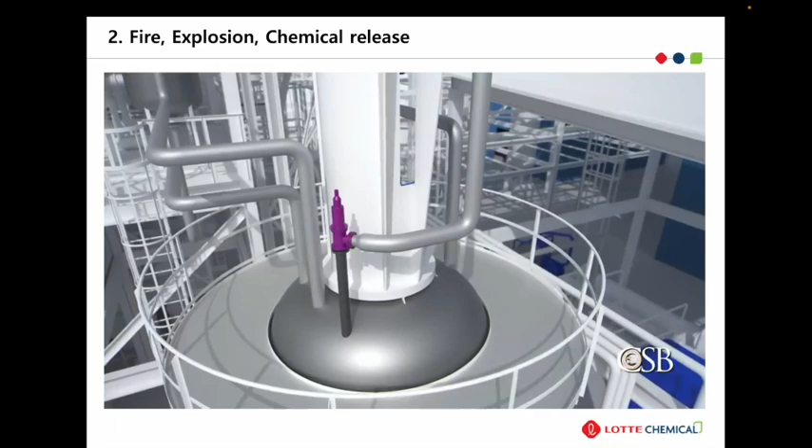Shortly before 10:30 a.m., the emergency pressure relief system activated. High-pressure ethylene vapor discharged from the reactor into the atmosphere. It was released horizontally toward an area where many people were working, rather than vertically to a safe location. Soon after, a nearby welding machine likely ignited the vapor, and a large fire erupted.

23 people were injured, many as they urgently tried to evacuate. The ethylene-fueled fire stopped after approximately 3 minutes, when the emergency relief valve closed as pressure in the reactor normalized. In total, over 2,000 pounds of ethylene was ejected to the atmosphere.

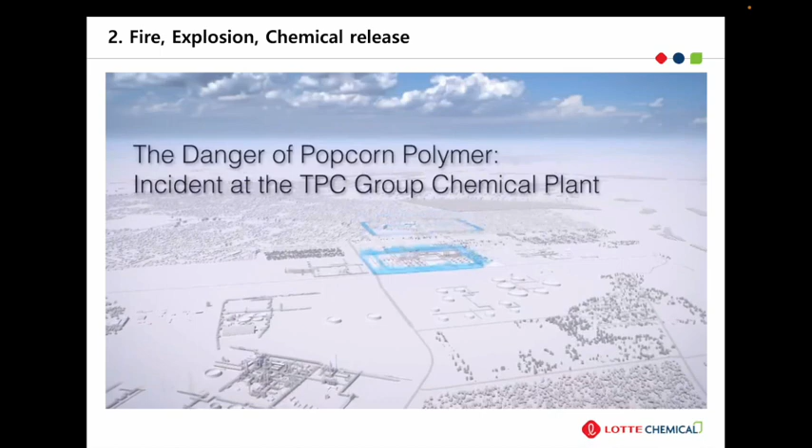TPC is a petrochemical manufacturing company with several facilities along the Gulf Coast of Texas and Louisiana. At the time of the incident, the company produced butadiene at its Port Neches plant. Butadiene is used as a building block in the production of a wide range of products, but is most commonly used to produce synthetic rubber.

It is a highly reactive chemical, which if not properly managed, can lead to serious hazards. For instance, in the presence of oxygen, high-purity butadiene can undergo reactions to form a solid substance known as popcorn polymer. If popcorn polymer accumulates and grows inside process equipment, it can lead to very high pressure and ultimately cause the equipment to rupture.

On August 4th, 2019, a worker performed a routine operation in TPC's butadiene unit. As part of that operation, the worker shut down a primary pump that was part of the butadiene production process. When the worker tried to restart the pump, it would not operate.

The primary pump was sent for repair and remained out of service from that date forward. A spare pump was used to continue operations.

The inoperable pump created a significant dead leg, which is an area of piping that is open to the process but does not have any material flowing through it.

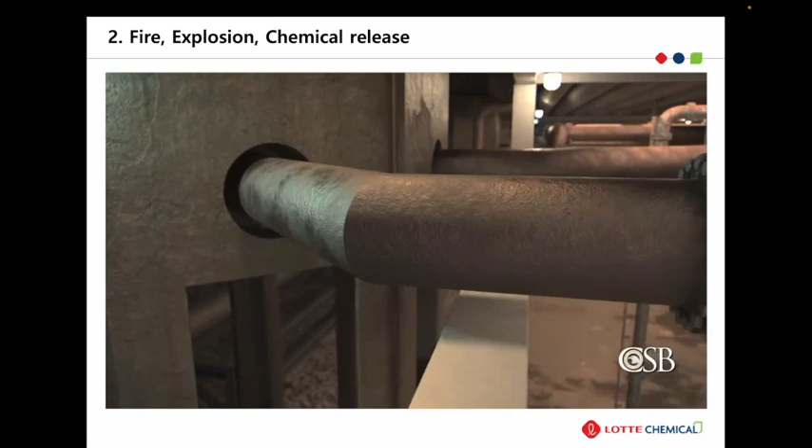At 12:54 a.m. on November 27th, excessive popcorn polymer buildup caused the dead leg piping to suddenly rupture. Approximately 6,000 gallons of liquid, primarily composed of butadiene, emptied through the ruptured piping in less than a minute. The liquid vaporized upon release to the atmosphere, forming a flammable cloud.

Three nearby workers were startled by the rupture. They immediately recognized the danger and quickly departed as the vapor cloud grew. In just 2 minutes, the flammable vapor cloud found an ignition source and exploded.

The resulting pressure wave destroyed parts of the facility and injured 2 TPC employees and a security contractor. The blast damaged nearby homes and buildings and was reportedly felt up to 30 miles away. Local officials stated 5 residents reported minor injuries.

At least 2 additional explosions occurred following the initial blast. Some of the piping damaged by those explosions could not be isolated. As a result, flammable process fluid continued to escape from ruptured equipment, and smaller contained fires burned for more than a month. At 10:09 a.m. on January 4th, 2020, the TPC Incident Command confirmed that all fires were finally out.

The Chemical Safety Board launched an investigation into the incident at TPC and found 4 key safety issues contributed to the incident. They are dead leg identification and control, process hazard analysis action item implementation, control and prevention of popcorn polymer, and remotely operated emergency isolation valves.

The first safety issue is dead leg identification and control. The TPC Port Neches facility had an operating procedure in place called dead legs in high purity butadiene service that was intended to minimize the formation of popcorn polymer.

The procedure called for running spare pumps within the unit twice per month in order to circulate material through piping that was connected to the pumps and was otherwise out of service, forming a dead leg.

The procedure did not, however, identify the potential for a dead leg to form if the primary pump was out of service for an extended amount of time, which is what happened in the months leading to the incident. Therefore, the procedure did not specify ways to mitigate the hazard of popcorn polymer formation should the primary pump be offline.

And the CSB found that although repair of the primary pump was initially prioritized as urgent, it was soon changed to routine due to the existence of the spare pump.

This led to a dead leg that existed for at least 114 days, allowing dangerous levels of popcorn polymer to form and grow.

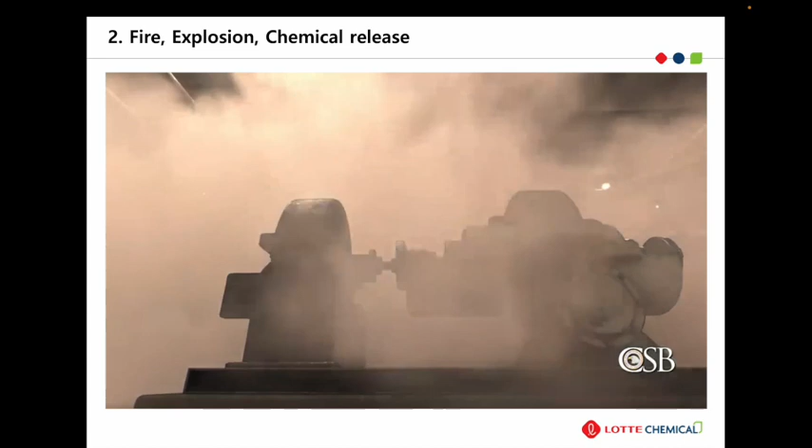Had TPC's procedure specifically identified the potential for a dead leg to form when the primary pump was offline, personnel may have taken action to prevent accumulation of popcorn polymer, such as prioritizing repair of the pump, purging the piping, or adding popcorn polymer inhibitor to the dead leg.

Instead, TPC appeared to consider the offline pump as a threat to maintaining unit operation, not as a threat to process safety, and the result was the destruction of the unit.

In its final report, the CSB made a recommendation to TPC Group to develop and implement a process to identify and control or eliminate dead legs in high-purity butadiene service.

In addition, the CSB identified gaps in industry guidance around the issue of dead legs in butadiene units. A guidance document developed by the American Chemistry Council called the Butadiene Product Stewardship Guidance Manual is designed to provide general information to companies that may handle or store butadiene.

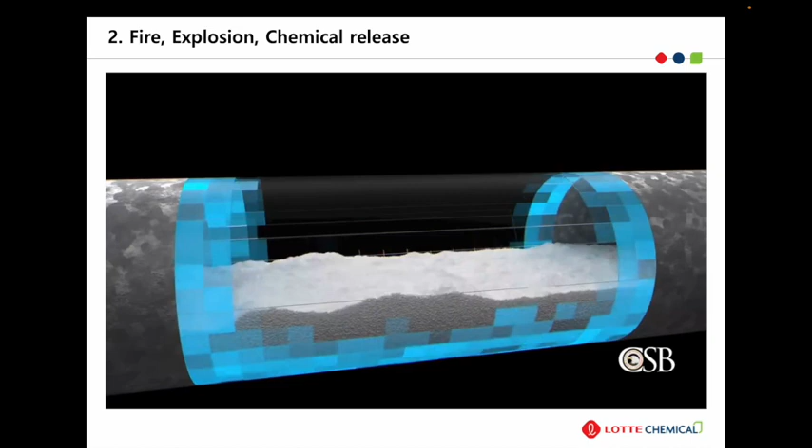While the manual gives a general overview of popcorn polymer, it does not contain any information on the potential consequences of dead legs or how companies should identify, control, or prevent dead legs. The CSB believes that such additional guidance could have helped to prevent this incident and could help prevent similar incidents in the future.

As a result, the CSB made a recommendation to the American Chemistry Council to revise its Butadiene Product Stewardship Guidance Manual to include guidance on identifying and controlling or eliminating dead legs in high-purity butadiene service.

The second safety issue identified by the CSB is Process Hazard Analysis Action Item implementation. The CSB reviewed two process hazard analyses, or PHAs, that focused on TPC's butadiene process. In one of them, a PHA performed in 2016, the hazard of popcorn polymer accumulation causing low or no flow was identified. The PHA team made a recommendation to TPC to assure that when equipment is out of service for maintenance, the lines are still flushed monthly.

TPC management accepted this recommendation and assigned a due date for implementation in December 2016, almost three years before the incident. But the CSB found that the recommendation was never implemented. Had TPC implemented the 2016 recommendation for personnel to regularly flush piping associated with out-of-service equipment, the dangerous buildup of popcorn polymer that led to this incident could have been prevented.

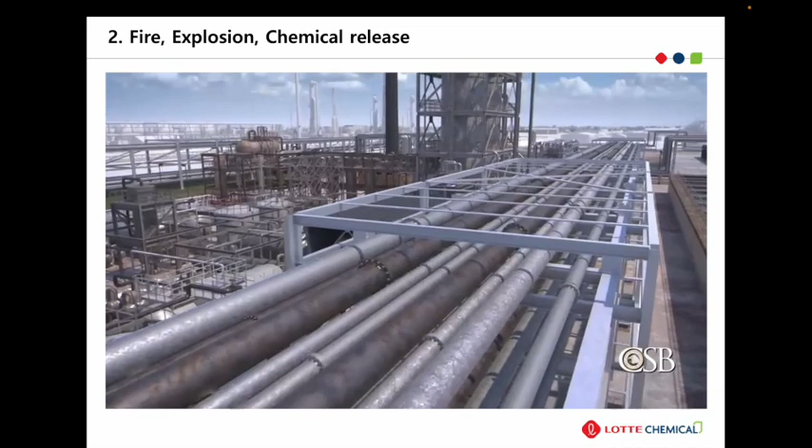For instance, prior to the incident, in April 2019, TPC began a series of operational trials, including removing a piece of equipment considered problematic from service. TPC also reduced the amount of popcorn polymer inhibitor that was injected into the production stream and used new injection equipment. Soon after the trials commenced, TPC experienced increased popcorn polymer formation within the process.

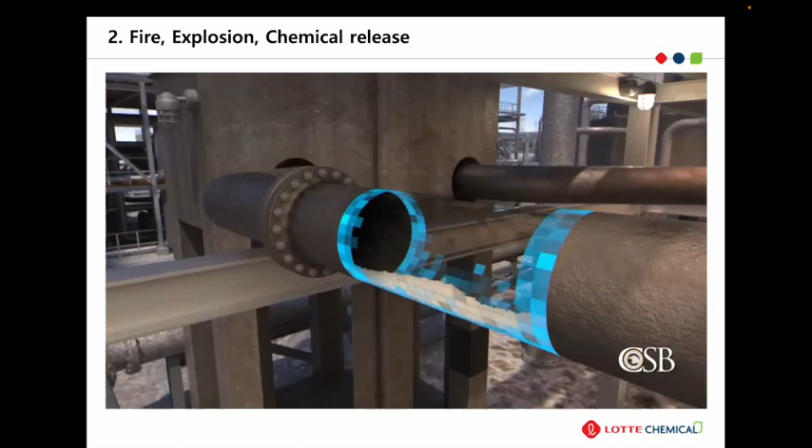Evidence of popcorn polymer formation was noticed by TPC employees as early as May and June. But in the meantime, TPC continued operating its butadiene unit and did not halt the trials that may have contributed to the problem. The facility continued to experience popcorn polymer and equipment plugging in the butadiene process, which led to serious operational problems within the butadiene unit.

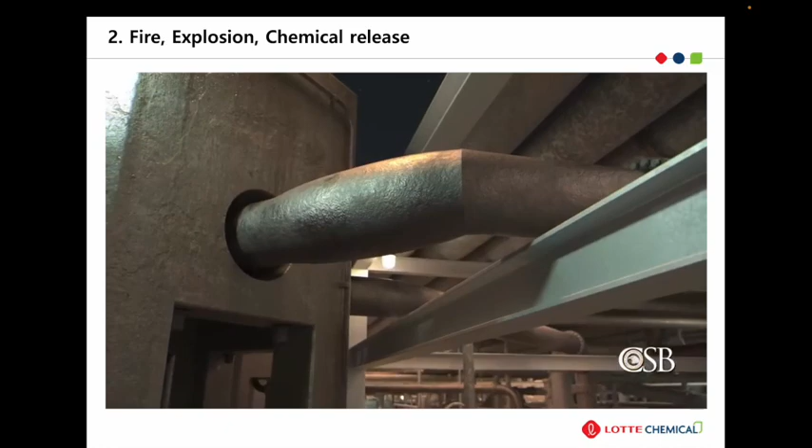After the extensive popcorn polymer plugging, TPC employees considered shutting down the unit for an unscheduled mini outage to clean up the polymer and make necessary modifications and improvements to bring the unit up to best practice standards. But after clearing several popcorn polymer blockages, TPC ultimately decided to delay this shutdown until 2020, when it was too late. Popcorn polymer excursions are highly hazardous events.

If there are any process vulnerabilities, like unknown dead legs, popcorn polymer can cause equipment ruptures, leading to explosions and fires. Butadiene facilities should develop robust policies aimed at preventing and controlling popcorn polymer. Facilities should also develop policies to shut down units and investigate popcorn polymer formation when it is observed. Had TPC had such policies in place, this incident could have been avoided.

The CSB also found an additional gap in the ACC's Butadiene Product Stewardship Guidance Manual. The manual did not specify conditions that could justify shutting down and cleaning a butadiene unit. As a result, the CSB recommended that the American Chemistry Council revise the manual to provide guidance to help companies identify what should be considered excessive or dangerous amounts of popcorn polymer in a unit, and provide mitigation strategies that operators should take when dangerous amounts of popcorn polymer are identified to control or eliminate the hazard.

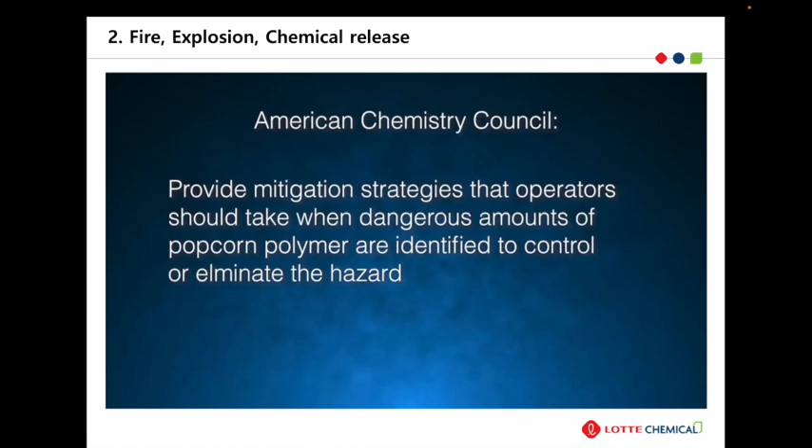Finally, the fourth safety issue identified by the CSB is remotely operated emergency isolation valves. At TPC, the butadiene process was not adequately equipped with remotely operated emergency isolation valves designed to stop process releases remotely from a safe location.

Had the butadiene process been equipped with remotely operated emergency isolation valves, it is possible that the process feed upstream of the release could have been stopped shortly after the release began, minimizing the size of the initial vapor cloud and explosion. Additionally, any secondary releases caused by the first explosion could have been stopped early in the incident. That step could have prevented some of the subsequent explosions and fires, minimizing the damage caused by the incident.

Instead, the unit was primarily equipped with manual and locally controlled emergency block valves, and these could not be safely accessed during the incident, meaning equipment could not be isolated. As a result, severe explosions caused one process tower to propel through the air and land within the facility, and other process towers to fall within the unit. Fires burned for more than a month and led to the ultimate destruction of the unit.

Manual and locally controlled valves are not reliable in a catastrophic incident, since often these valves cannot be safely accessed. Companies that handle large amounts of flammable or toxic material should furnish equipment with remotely operated emergency isolation valves so that potential releases can be stopped from a safe location.